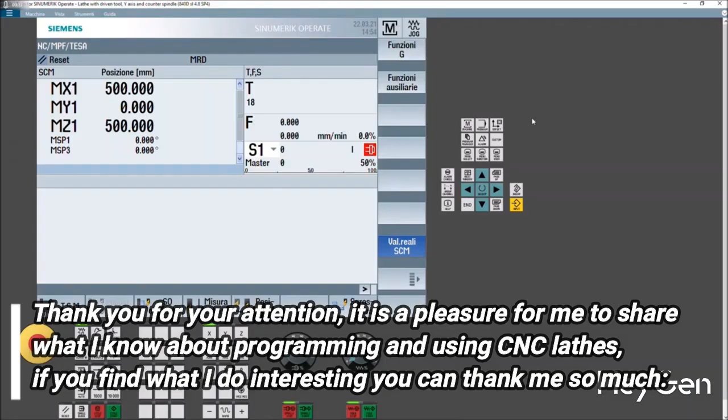I received a request from some of you about using DXF files, which at the time of the request I wasn't using. I tried to accommodate your request by doing some tests. I believe that in turning, starting from a DXF can sometimes be more complex than using conversational programming. That said, knowing all the capabilities of a numerical control can only be beneficial. It also depends on the software you have available in what will be our technical office.

By fiddling a bit, I saw that Sinumerik allows the option to start from a DXF, both in turning and milling operations, as well as allowing flexibility. So let's do some examples.

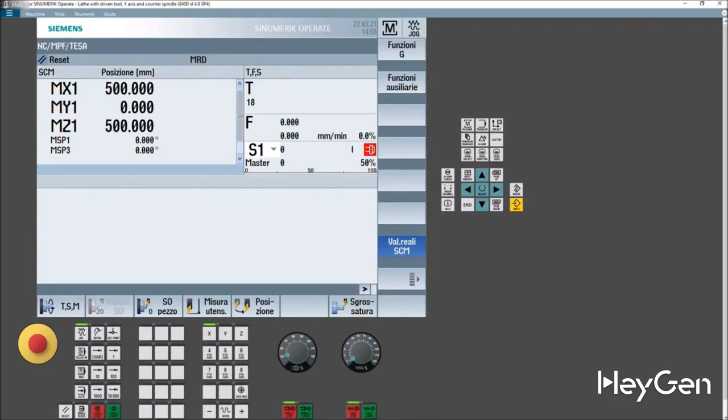Let's start with milling, specifically with pocket milling. I drew this profile that I've roughly dimensioned in the two main sizes. It's a profile that measures 250 mm in one direction and 224 mm in the other direction.

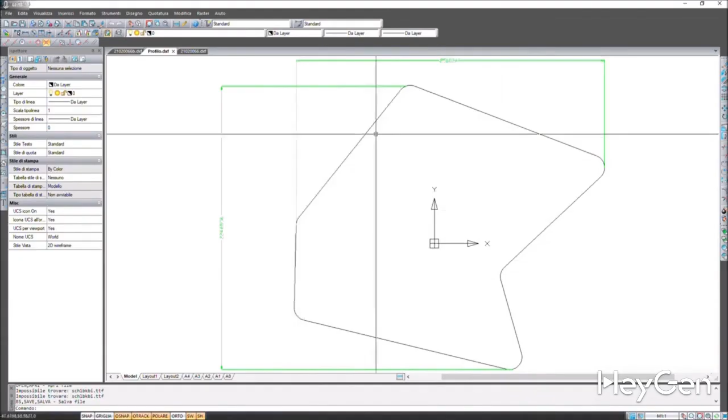In a case like this, starting from CAD, from the DXF drawing, is indeed more convenient than building the entire profile from scratch.

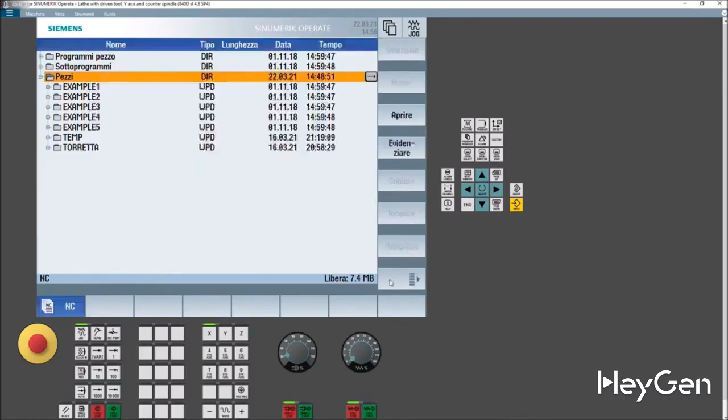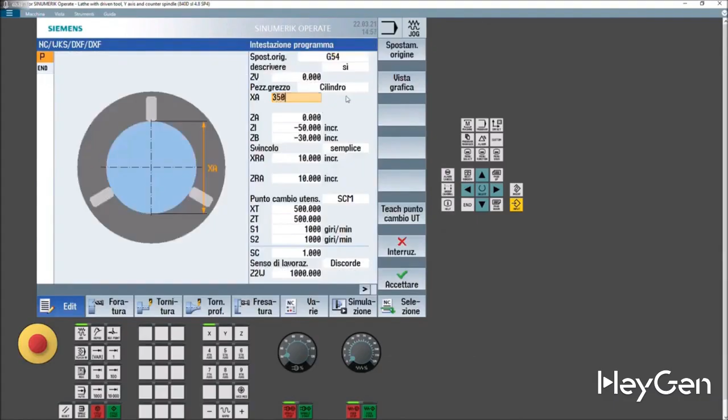Let's go into our Sinutrain, to Program Manager and to Parts. Let's start by creating a new program that we'll call DXF, with all the creativity in the world. In Shop Turn, let's define a cylinder with a diameter of 350. Let's accept it and see how we can create a pocket starting from the DXF.

We'll go into our milling menu and ask to mill a profile. When I ask to mill a profile, it asks if I want a new profile or a predefined profile. We're creating a new profile. We have the usual option to draw the profile or import from DXF.

So let's import from DXF. Let's give it a name and press Enter. The machine takes us to the hard drives we can access, whether the USB drive or the system hard drive. In this case, we go where I saved the DXF, called profile. Here it is.

Now it's asking me to define a reference point. I can choose an element and define the start or the end with the cursor, or I have free input. In this case, for example, it could be x0, y0. Let's give the OK.

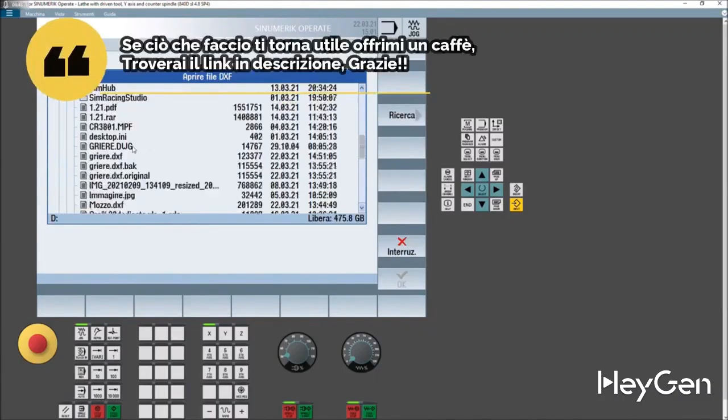Everyone will have saved it in a part of the PC or CNC that they prefer. So you go to the profile file of the DXF and give it the OK. Now we need to establish the point 0,0 in relation to the drawing, so let's define the reference point.

We can use the cursor, or press an element, or type in some coordinates. For simplicity, right now I'm using the cursor. Now I need to select an element.

I can select the element either with my cursor or by having it established at CNC. The only thing it will ask me is what is the starting point that we will begin working from: the starting point of the element, the end point, the center point. We use the starting point. Then we give it the OK.

He moves to the second point that he believes belongs to the profile. Otherwise, I'll have to go outline them myself, but that's not good. So I'll accept the element until the moment I want to continue the profile. I could also execute a partial profile and then continue it in my drawing. When he closed the profile, I accept it and finish the acquisition.

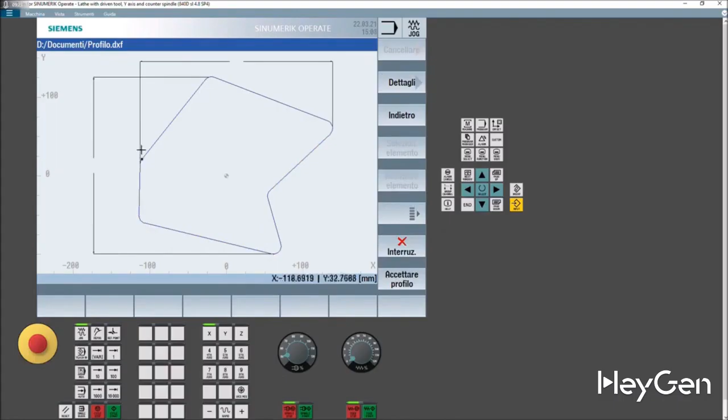DXF profile. Let's define the reference point on which all its data will be calculated. Let's select an element. We accept it. And we go ahead and accept all the other elements. Perfect. You see, you need to close the shape. Don't do like I did earlier, I forgot the last little piece. We accept the profile and finish the acquisition. Now we see that the profile is closed. So we accept it and tell the machine.

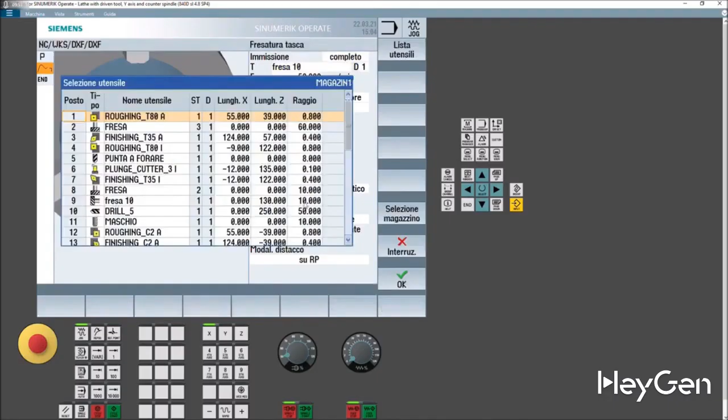Good. On this profile, let's do a milling operation. In this particular case, I want to make a pocket, so I'm going to select a cutter. Let's see what we have here. The cutter 10. Cutter 10 is a radius cutter. Perfect. Diameter of 10. Perfect. We give it our OK, the usual cutting data. Our increment in depth. The depth of our pocket 10 mm, our increase in depth, let's make it 5. Otherwise, it will take forever.

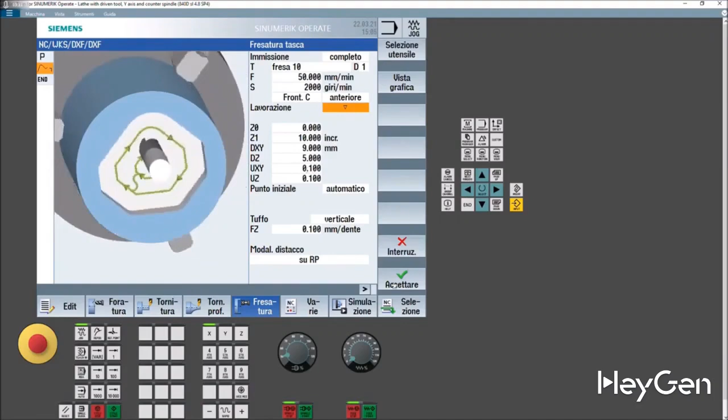And we choose whether we want to do a roughing, a bottom pass, an edge pass. In this case, we're doing a roughing. And then these are all the various variables that I had already taught you, more or less, in the previous tutorials. So, we accept and simulate. Increase in the plane too large, crest remain. Residue. What does this mean? Let's take a look.

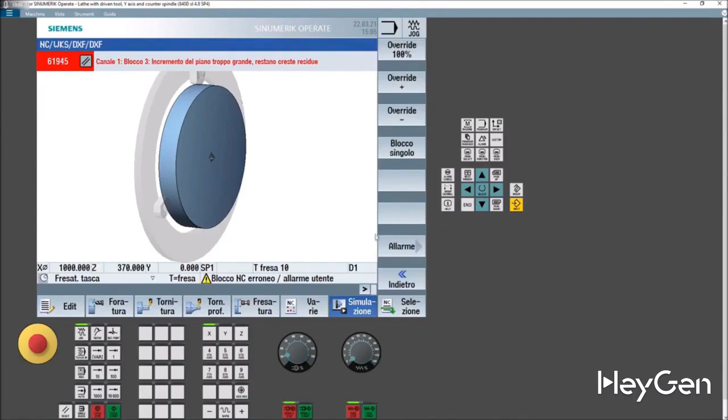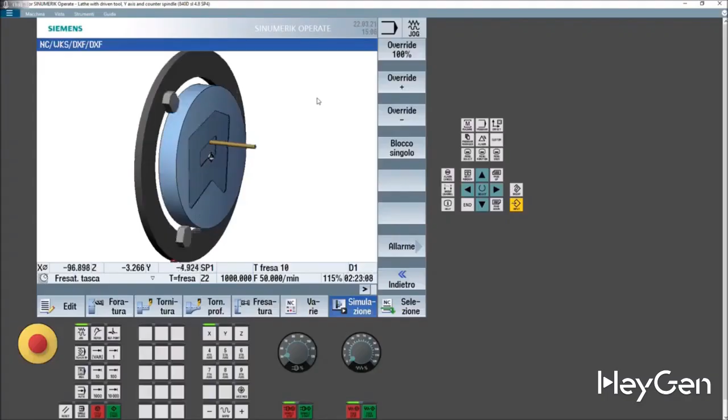Let's cut a bit of the depth. I probably overdid it a bit with the removals. We accept and simulate. I had overdone it a bit with the removal compared to the cutter diameter. And in fact, you see that now it's starting to work on my profile. Here, I created a profile randomly, without any meaning and without any particular processing. But this type of DXF import is valid for any profile we want to create. I finished the processing, and that's it.

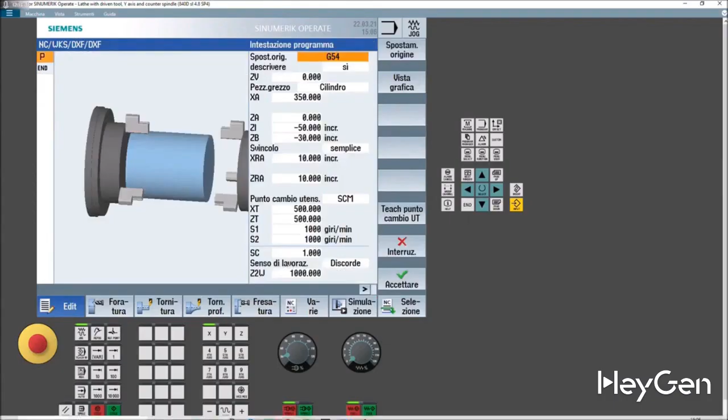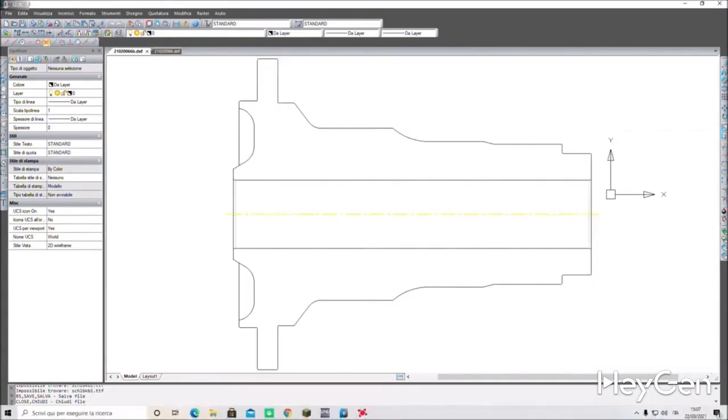Let's go back to editing. Let's delete everything. Let's go get my cylinder. And let's open our CAD for a moment. Do you see this hub? I'll just show it to you for a moment, because it's a real drawing. I've cleaned it up from the dimensions, and now I want to perform a turning of the external profile. Very simple. After I have properly scaled the blank, which by now you're doing great at, let's go to turning CAD profile.

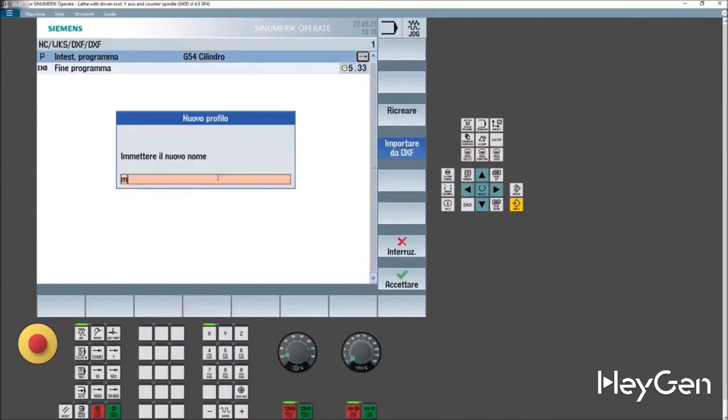The procedure is the same as what we saw in milling. So, new profile, import from DXF, we'll call it Hub. Let's accept it. Let's go look for our file where we know we previously put it. Here it is, hub DXF, and here's our nice drawing. Here too we need to define a reference point. We enable element center and the reference point will always be our zero, the face on which we want to build our reference point. In turning, at least for me as a pure turner, everything is much easier. Now let's select the elements related to our turning.

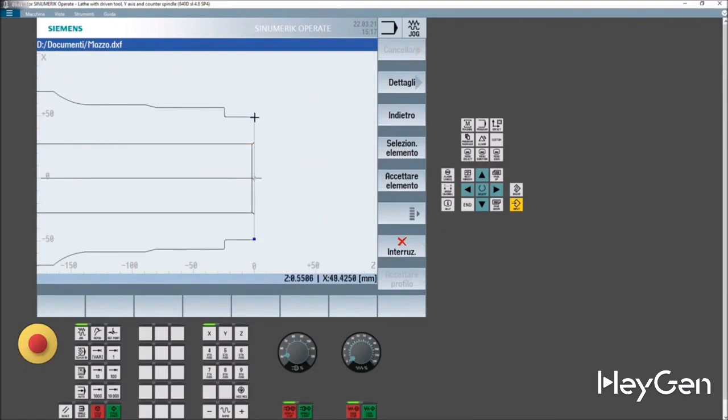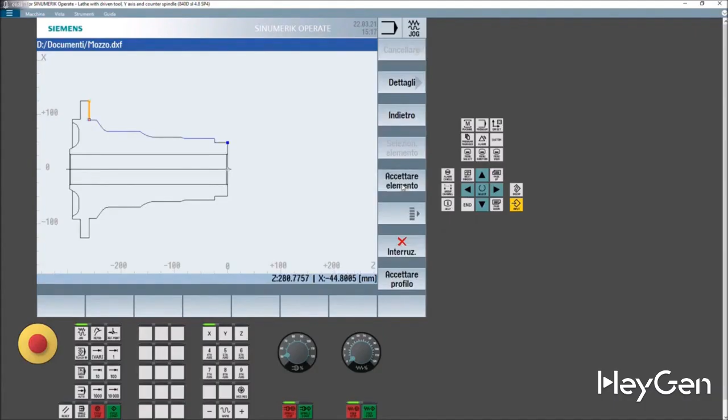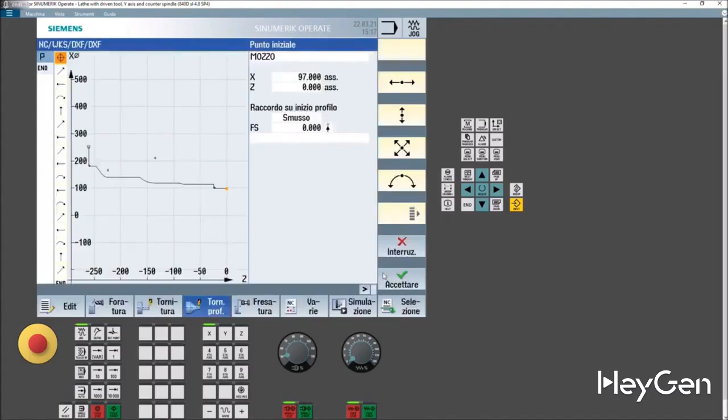I want to start working from this chamfer. So I'm going to select the chamfer. I give him the OK. And then I will go ahead and accept all the elements up to the point where I want to perform my turning. Perfect. I accept the profile and complete the acquisition. Here's the external turning profile. I accept it. And I won't do anything else, like in the previous videos where I drew the profile directly inside Simulatore. A roughing, it should be already done, more or less.

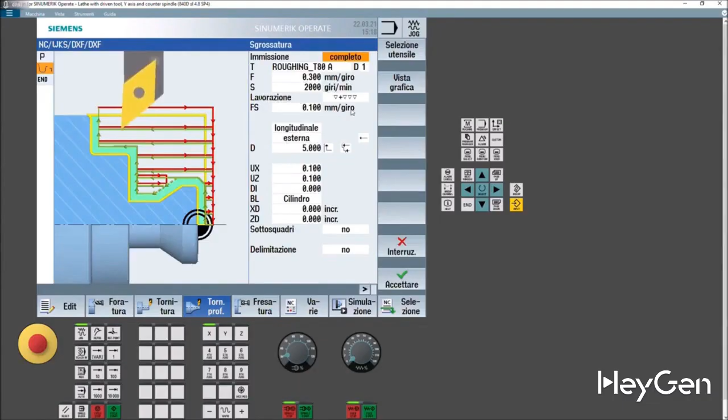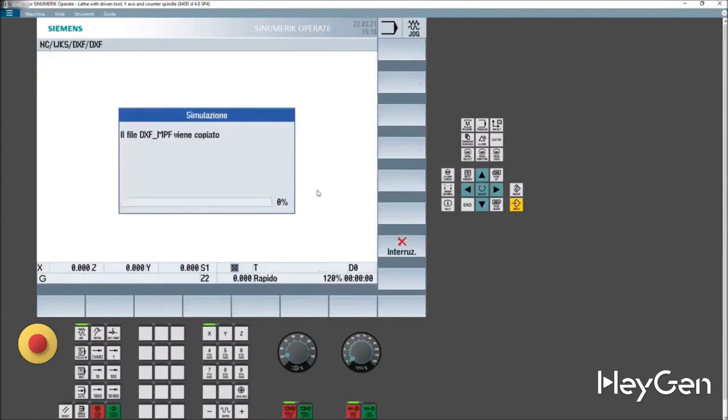I filled it out because last time I used an 80-degree tool, so I'll just go with those parameters. I'm just doing the roughing. I accept and simulate. Too fast, let's slow it down. Check program, and start. And as you can see, the profile created earlier in the CAD at the office will be respected. Here it is. Nothing particularly difficult.

After that, you need to adapt a bit to the needs of the various machining processes, everything we've seen in this video, but basically just get started. I would say that working with a DXF using Simulatore is quite easy. I hope what I showed you in this video was of interest to you.